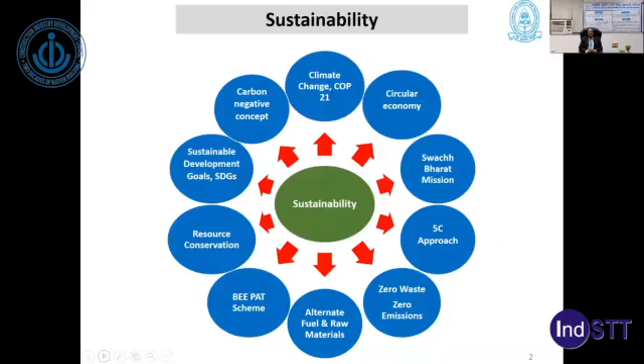If you look at the 5C approach, in the cement industry we are producing clinker, then cement, then ultimately building materials take it, making the cement as a raw material, then making concrete, and ultimately constructions and carbonation. This is the 5C approach.

For clinkers, our target is less consumption of limestone and fuel. That's why alternate raw materials and alternate fuels can be utilized as a partial replacement of clinker. Similarly for cement, we are utilizing less clinker consumption to reduce carbon dioxide emissions, making blended cement utilizing fly ash and slag as largely industrially available materials. So the clinker contribution in cement will be minimum.

Similarly, with concrete, we have to make it with less cement consumption, and use admixtures to optimize the mix constituents. For construction, similarly carbonation will also be reusable. Carbon dioxide emissions from the calcination of limestone to make clinker can be stored, and that stored carbon dioxide can again be utilized for the carbonation properties of concrete.

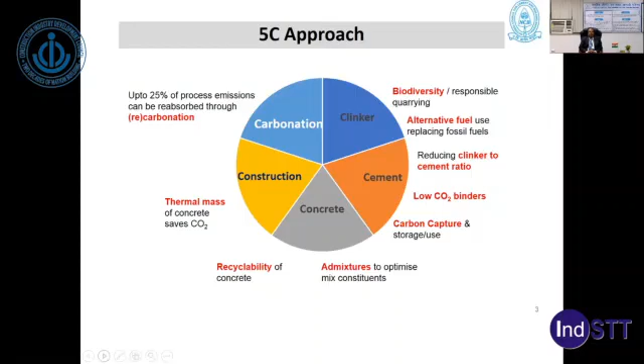In NCCBM, depending upon the presence and requirements of the industries and building materials, we have made 22 expertise teams like mineralogy and microstructures, new clinker systems, low carbon cement, high temperature technologies, XRD and XRF SRM, advanced analytical techniques, alternate fuel and raw materials, advanced comminution and particle technology, and advanced pyro-processing.

So you can see this is completely related to the cement industries. And energy conservation, renewable energy, carbon capture and utilization, power system instrumentation - these are the expertise teams supporting the cement industries.

Structural design and seismic evaluation, geopolymer concrete, repair materials and rehabilitation, advanced concrete composites, reinforcements, corrosion prevention and mitigation, concrete durability and microstructures - these are the groups working for the durability of the latest designed concretes.

BND and SRMs - you may know Bharatiya Nirdeshak Dravyas and standard reference materials are also being developed by NCCBM, and we have released 12 standard sample BNDs, which is helping in import substitution. Under Atmanirbhar Bharat, this is an important project we are conducting with support from the National Physical Laboratory. Laboratory accreditation management - NCCBM also supports enabling accreditation of laboratories on its own premises, as well as for the Indian cement sector.

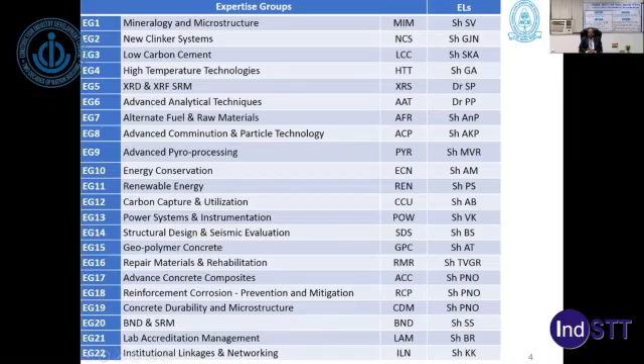Regarding carbon dioxide emissions from the Indian cement industry, the cement industry is often considered one of the highest polluters. But now it contributes only 7% of anthropogenic carbon dioxide emissions. The total carbon dioxide emission from Indian cement industry is 200 million tons per annum. The target for reduction of carbon dioxide emission in 1996 was 1.12 tons of carbon dioxide per ton of cement, and it was reduced to 0.670 tons of carbon dioxide emission per ton of cement by 2017.

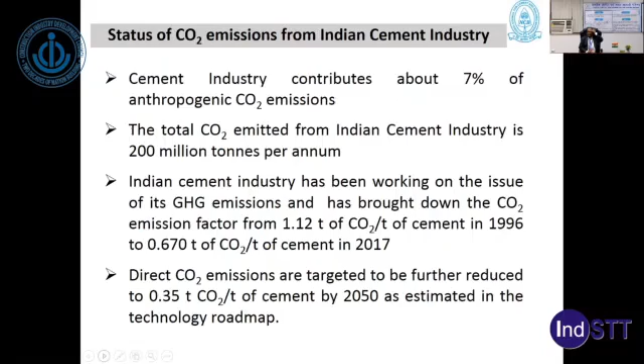So the target is still there. We have to reduce the carbon dioxide emission per ton of cement to 0.35 tons by 2050, as estimated in the technology roadmap.

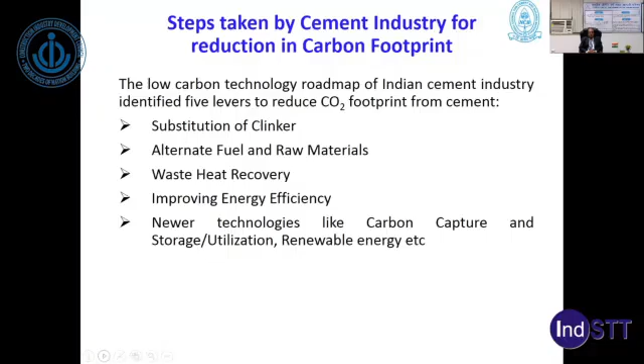So for that, the steps taken by the cement industry for the reduction of carbon dioxide footprint are five levers: substitution of clinker, alternate fuel and raw materials, waste heat recovery, improving energy efficiency, newer technologies like carbon capture and storage, and utilization of renewable energies. These are the 5 levers we are working on together for the reduction of carbon dioxide emission.

So you see in the graphs that clinker substitution has the greatest potential for the reduction of carbon dioxide emissions, and after that, carbon sequestration.

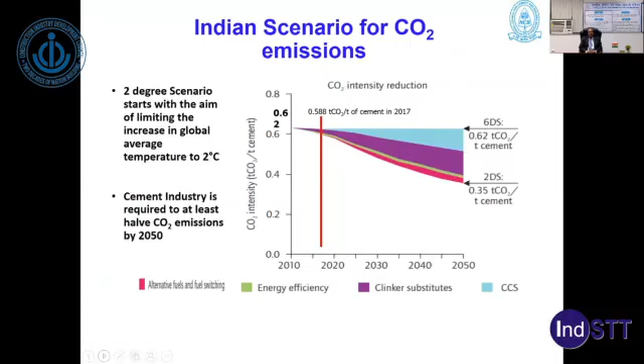Now you see the blended cement distribution in India. In 1995, you will see the figures: 70% OPC, 19% PPC, and 11% Portland slag cement. With the advancement to the year 2017, 70% OPC has become 27% OPC, 19% PPC has become 65% PPC, and 11% PSC has become 7% PSC. And in this figure, 65 plus 7, 72% of total cement produced in India is blended cement.

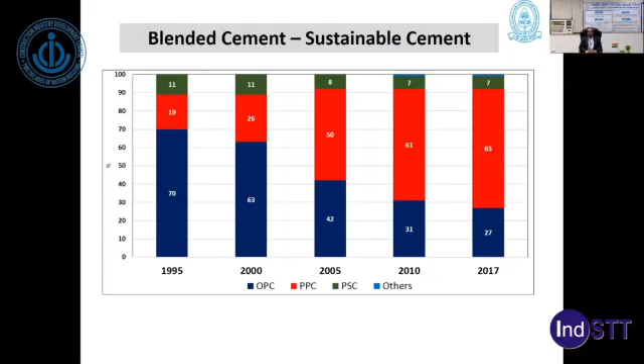And steps undertaken by NCCBM for low carbon cement: besides this cement, NCCBM is continuously doing research on the development of new types of cement to reduce carbon dioxide emission. For that, you see Portland limestone cement, where limestone can be utilized from 15 to 35%, including different grades of limestone. Portland dolomite cement: dolomite is not utilized in cement manufacturing, but dolomite can also be utilized as a clinker replacement to make Portland dolomite cement.

Portland composite cement based on fly ash and limestone, or composite cement based on fly ash and slag. Composite cement has already come to the market, and because slag is not available everywhere, NCCBM thought another ternary composite cement can be developed utilizing fly ash and limestone. Limestone is plentifully available everywhere, and fly ash is also plentifully available. Out of 200 million tons of fly ash generated in the country, 26% is utilized by the cement industry, and still 26% remains unutilized.

So we think that by utilizing this fly ash and limestone, there is a potential for the reduction of carbon dioxide emission. Then we developed a low carbon clinker, belite calcium sulfoaluminate clinker and cement. This is a new type of clinker NCCBM developed. Because for the last 50 years, we have been producing high alite clinker, as a result of which we are utilizing high grade limestones, our burning temperature is about 1450 degrees centigrade, and carbon dioxide emission is high. So now by developing this low carbon clinker, there is a potential to reduce carbon dioxide emission by 30%, and the temperature can be reduced by 200 degrees centigrade.

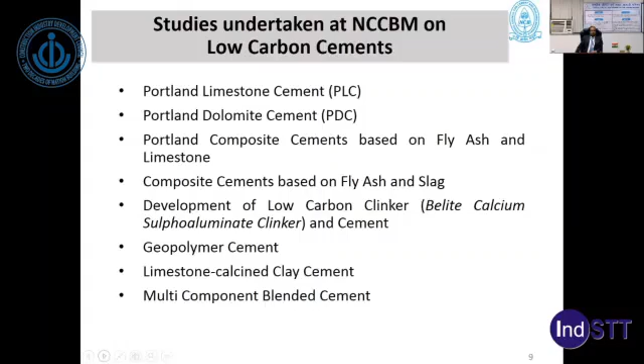Similarly, multi-component blended cement can also be utilized. In a 4-component system, slag, fly ash, limestone and clinker can be utilized together. And in this respect also, we are doing the work.

The new clinker which we have already discussed has about 52% beta-C2S, belite, and a new phase of 22% ye'elimite, that is calcium sulfoaluminate. With this clinker, we have seen that it gives high compressive strength in 1 day, and the rate of development is lower, but at the same time, we are getting about 48 MPa strength in 28 days. This clinker has been developed utilizing low-grade limestones and industrial waste. And we have seen that the firing temperature is reduced by 200 degrees centigrade; at 1250 degrees centigrade, this clinker is completely formed.

And low grade limestone can be utilized up to 15%. And industrial byproducts can be utilized as a source of the iron and sulfur. Jarosite, red mud, wollastonite, these are the byproducts of different industries that can be utilized. And by that, carbon dioxide reduction will be 20 to 30% as compared to the conventional clinker.

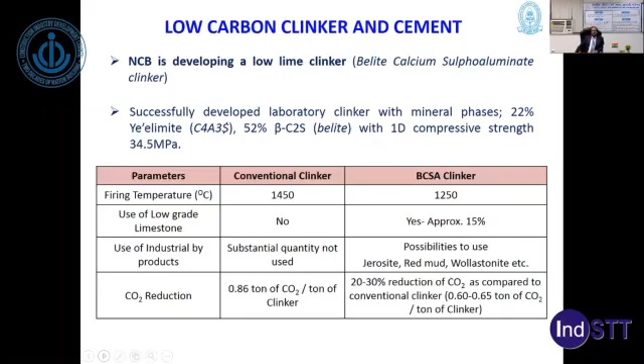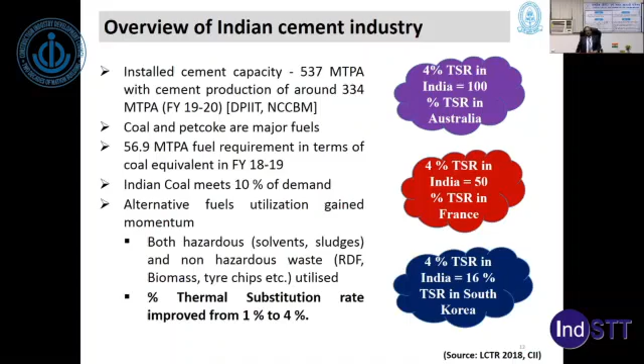Then alternate fuel use in the Indian cement industry. This move was also taken from 2005. An alternate fuel means any material having calorific value like plastic waste, polythene, agricultural waste, carbon black, tire chips. Those which have heat value can also be used as a replacement fuel in the cement industry, and the cement industry utilizes them as a source of fuel.

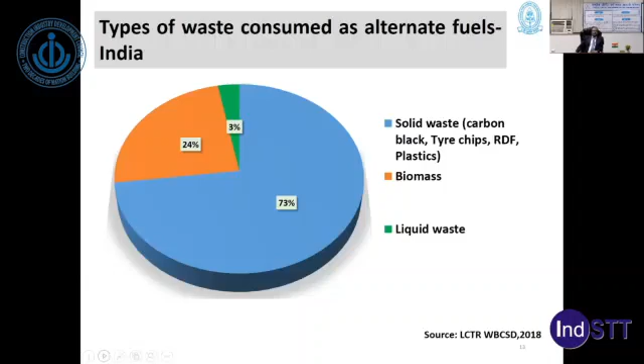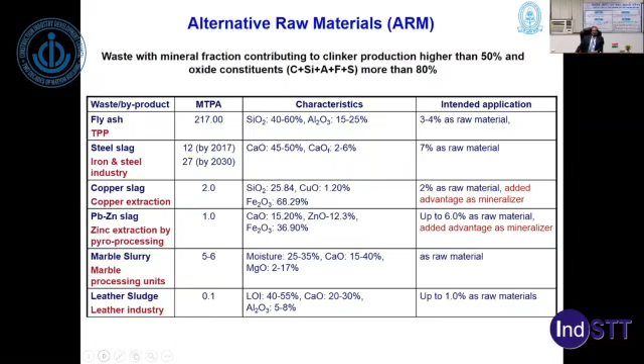Similarly, alternate raw materials. Now we are using limestone, clay, and muram as raw materials in cement. But at the same time, industrial waste like fly ash, steel slag, and other things having alumina, silica, iron can also be utilized as alternate raw materials. So our thrust is there: how to identify the different types of raw materials that can be utilized as alternate raw materials in the cement industry.

The third lever, you can see, is energy efficiency. Here you can see how to recover energy, electrical energy, and also renewable energy, wind and solar. Waste heat recovery systems are already implemented in so many industries. At the same time, we are exploring renewable energy installed capacity like wind and solar. By this we can reduce, and the plants in the PAT cycle surpassed the energy saving targets and achieved savings of 1.48 MTOE, which is around 81% higher than the saving target.

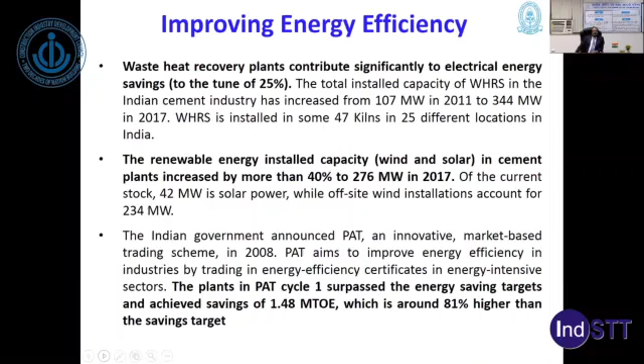Then about energy efficiency, NCCBM has expertise in its energy efficiency group. NCCBM is an accredited energy auditor, and 7 certified energy auditors are already there. NCCBM has been actively involved in developing normalization factors for the PAT scheme, and has carried out over 100 energy audits of cement plants. NCCBM has also undertaken techno-economic feasibility studies for setting up waste heat recovery systems at cement plants, and energy monitoring and motivation for improvement. National awards for energy efficiency in the Indian cement industry are also done by NCCBM.

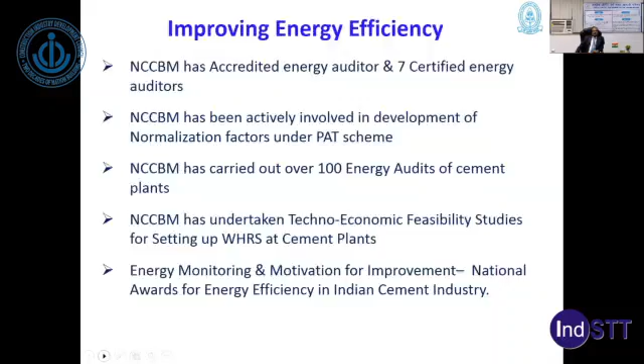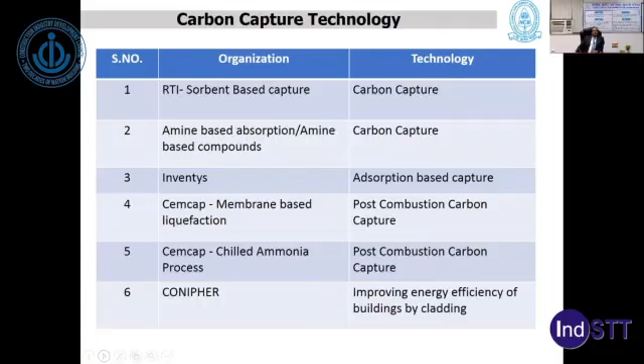And studies are undertaken for resource optimization. NCB has already done work on high magnesia clinker, where 8% MgO clinker can be successfully utilized for the production of PPC and PSC, so that limestone with certain MgO limits can be utilized in clinker production. It will also save about 15 years of life of the limestone reserves. Similarly, slag, synthetic slag, and coarse fly ash of 200 to 250 square meters per kg are not utilized now in the cement industry. We are also taking up projects on how to utilize this coarse fly ash.

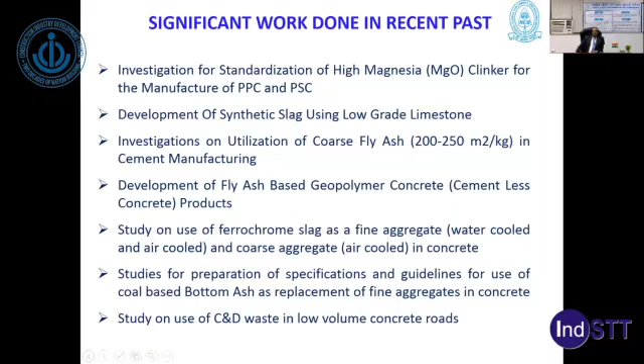Development of fly ash based geopolymer concrete, a cementless concrete. Ferrochrome slag as a fine aggregate and coarse aggregate in concrete. Study and preparation of specification guidelines for use of coal-based bottom ash as a replacement of fine aggregate, and study of the use of C&D waste in low volume concrete roads. This work has been undertaken by our CDI department.